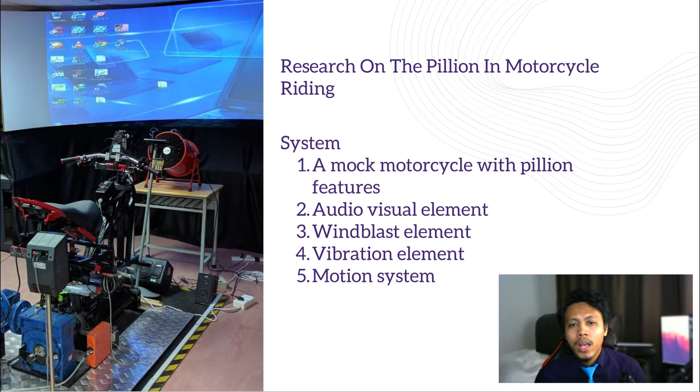riding a motorcycle. The vibration system for the simulator uses a device called ButtKicker Gamer 2. This device simulates the bumps on the road when using the simulator. Lastly is the motion system. The motion system uses a DC servo motor at the roll axis to simulate the roll of the motorcycle.

Since all of the simulator's equipment is plug and play, the screen hinders the ability for the simulator to be moved anywhere since it is permanently fixed to the facility. There are also some third parties that are interested in renting the simulator at an external venue. With the simulator being affixed to the facility, the laboratory has to turn down the offer. This causes a lot of missed opportunity for the facility.

Therefore, this project aims to solve this problem by designing a new screen that is portable for the use case of this motorcycle simulator. Research on the previous designs for the portable curved projector screen was done in order to find any design that would help in developing the design for this project. Through searches on Google Patents using a combination of keywords such as curved projector screen, curved portable projector screen, and portable projector screen, there are currently limited designs that will fit the use case of this project.

However, there are 2 patents that are notable. The first patent is from Starkweather, where it is an invention of a curved projection display that uses 2 or more rear projections for creating an immersive environment. The rear projection will project onto a translucent display with the distortion being corrected optically while being projected onto the screen. Meanwhile, the other patent is a patent on a portable projection screen which focuses on the portability of the

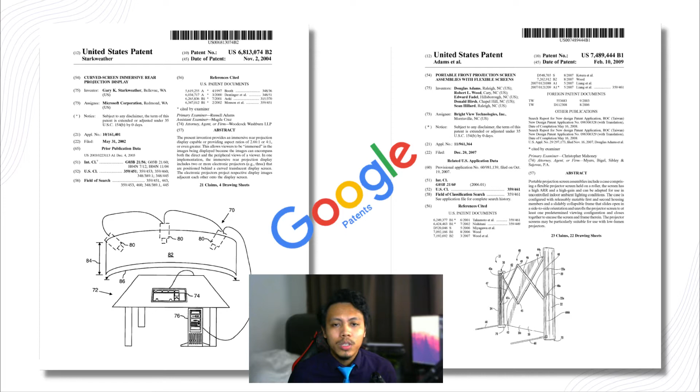projection screen. The projection screen is flat rather than curved. The patent uses a flexible projection screen held by a roller in which the screen is encased in a housing that can slide to collapse the projection screen. What this project needs is a curved portable projection screen. But why use a curved projection screen?

The curved screen was introduced in the year 1937 at the International Exposition in Paris. The idea of using a curved screen for projecting media was not commonly used until it was used by Cinerama. Cinerama inventor Fred Waller conducted research on the curved screen and concluded that the curved projection screen increases the immersiveness of the viewer by including the image in the viewer's peripheral vision.

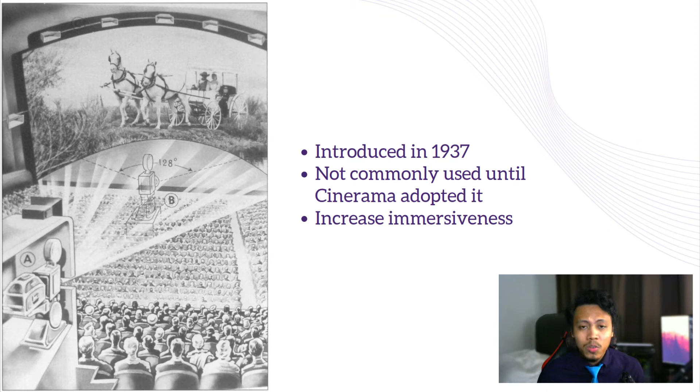This makes the viewer feel like they are right at the center of the image rather than viewing the image on a screen. But there are now widely available consumer products that are used to simulate virtual realities. The most common approaches in displaying images in simulations are through either head-mounted displays, monitors, or large projection screens.

The most immersive experience was found to be using the head-mounted displays and large projection screen. However, there is no significant difference in immersiveness when comparing the 2 methods, as both of them show the same level of immersiveness. The cost of a head-mounted display is significantly higher than a large projection display.

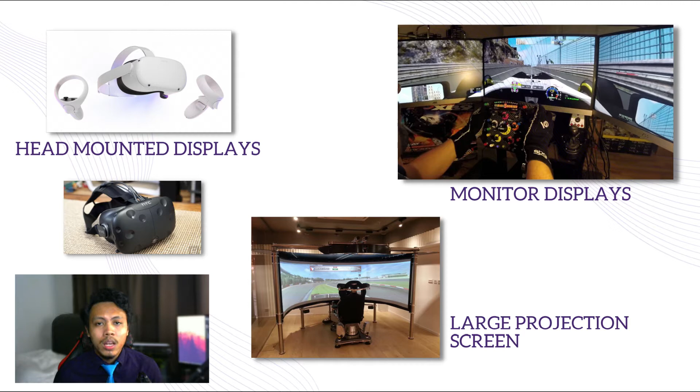Most head-mounted displays are wired, which would hinder any movement from the observer. Therefore, a large projection display shows more promise while being way cheaper than using a head-mounted display. Moreover, since the use case for this project is simulating riding a motorcycle, the use of a helmet is required. This would mean that there is no way to wear the VR goggles.

The development of the portable curved projection screen should take into consideration the human ergonomics while riding the motorcycle to ensure it closely simulates the riding experience of the motorcycle. The screen would consider the vision of the rider while wearing the helmet.

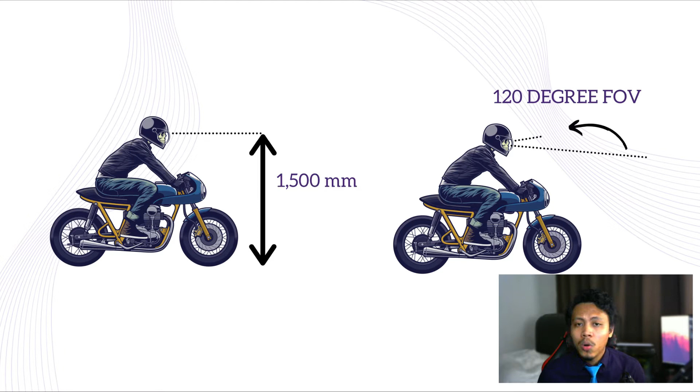The minimum peripheral vision allowed for a helmet is 120 degrees, and the riding height of the rider should be taken into consideration. The average ride height of motorcycle riders in Malaysia is 1.43 meters at eye level from the ground. Coupled with the additional height from the simulation system of Postura Motergo, the middle point of the screen should be around 1.5 meters in height.

Based on what has been said, there are currently limited designs of a portable curved projection screen. The existing designs are either curved or portable. There is no design that incorporates the two together. Therefore, to fulfill the need of the Metal Labs Postura Motergo indoor motorcycle simulator, a new design that considers both criteria is needed.

Therefore, the objectives of this project are to determine the design parameters of the portable curved projection screen, to design the portable curved projection screen based on the determined parameters, and to analyze and validate the design using computer-aided design and computer-aided engineering.

The scope of this project is to design a portable curved projection screen for the Postura Motergo motorcycle simulator. The project should be limited to the design of the screen for the motorcycle simulator. Therefore, the design of the screen should take into consideration any relevant specification of the simulator itself.

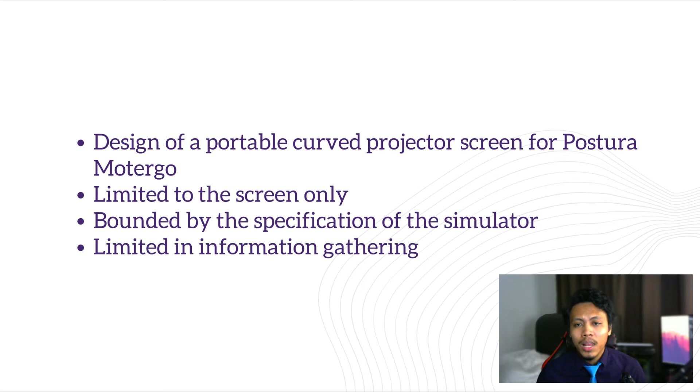On top of that, with the ongoing movement control order due to the COVID-19 pandemic, the project is limited to online pictures of the simulator, online discussion with the members of the Metal Lab, and the journal for the motorcycle simulator as a source of information for this project.

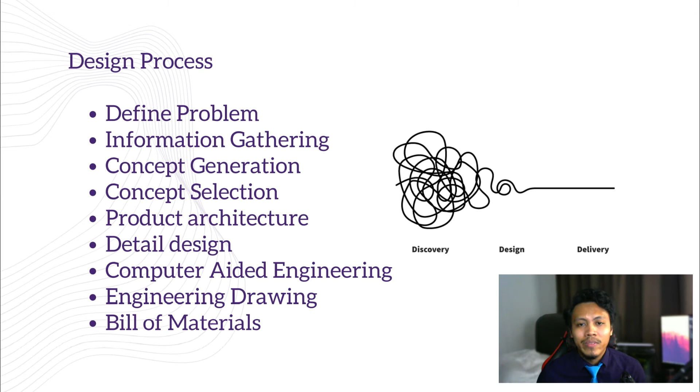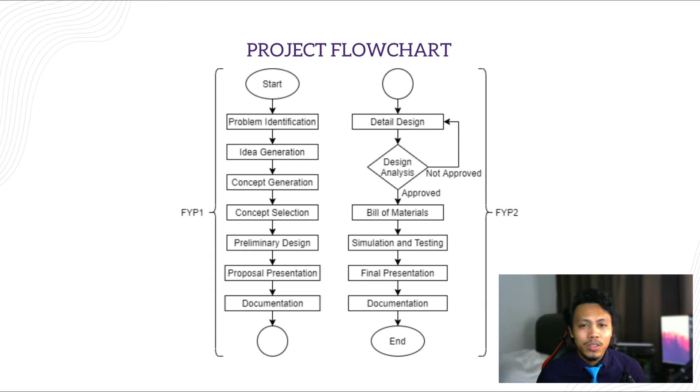FYP1 will cover the problem identification, information gathering, concept generation, concept selection, and preliminary design on top of this proposal presentation and documentation. As for FYP2, the project will continue with the design process with the product architecture, detailed design, computer-aided engineering, engineering drawing, and bill of materials.

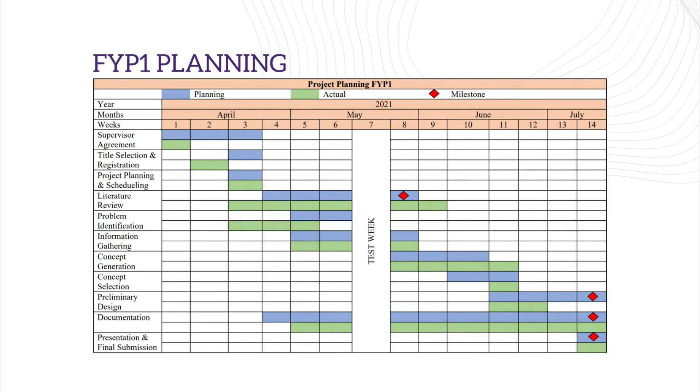And this is the Gantt chart for FYP1, which has been completed during this semester. The Gantt chart shows my progress in this project along the semester from week 1 until week 14. Most of the problem identification was made through speaking with the Metal personnel, who voiced their opinions on the existing projection screen. The information was gathered and used as the design goal for this project.

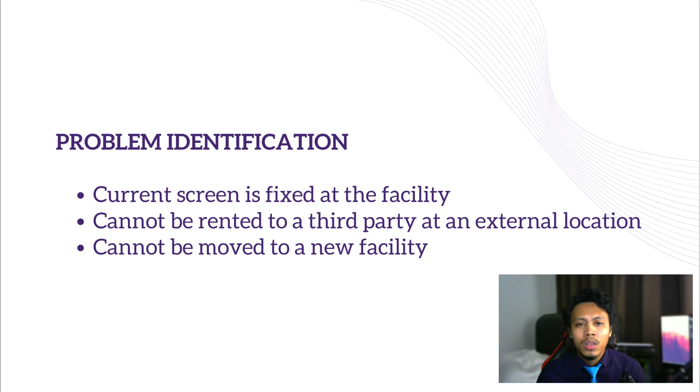The main problem with the current design of the projection screen is that it is permanently fixed to the Metal laboratory, which causes more problems, such as it cannot be rented to a third party at another location for profit. The Metal laboratory cannot be moved to a new facility, and the screen was made from plywood and metal, which was a cost-saving measure in the early development of the simulator.

The product on the market was taken as a benchmark when designing the projection screen. This product was taken from an online marketplace called EC21. The product will act as a design benchmark for this project. Using the gathered information, a product design specification was developed. The PDS helps to address the needs of the Metal laboratory with the design of the project.

The PDS for this project is that the product is to be used as a projector screen. The screen must maintain a recognizable screen ratio. The height from the eye level of the rider to the middle of the screen is 1.5 meters.

The screen is curved at a radius of 1.5 meters. The screen has a 120-degree field of view. The product can be disassembled and reassembled. The disassembled parts must not exceed 2 meters in height and length.

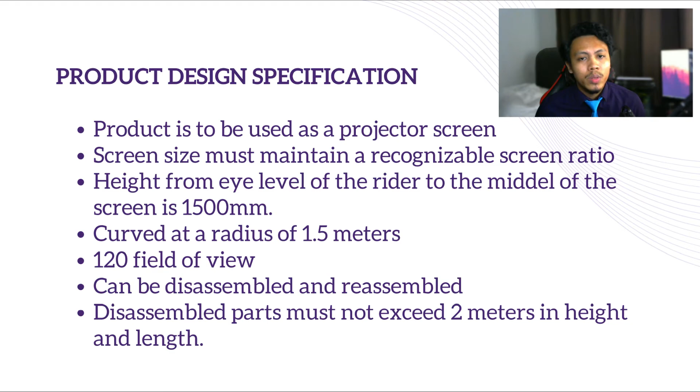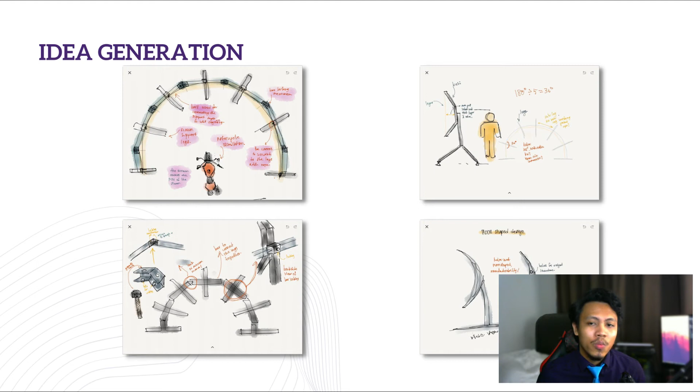The idea for this project was sketched in order to document the ideas for it to be considered in the concept generation. Some of the sketches were used in the concept generation while some were scrapped as the product design specification evolved.

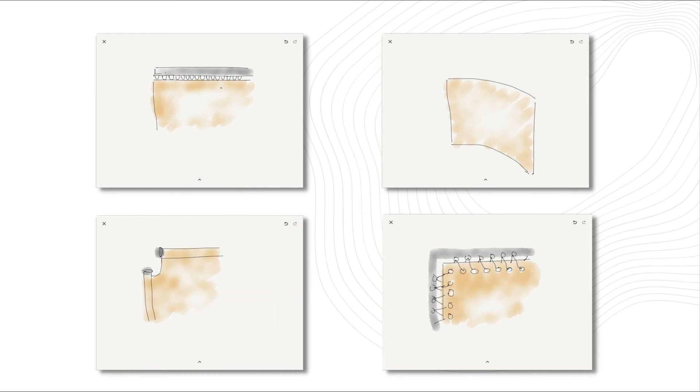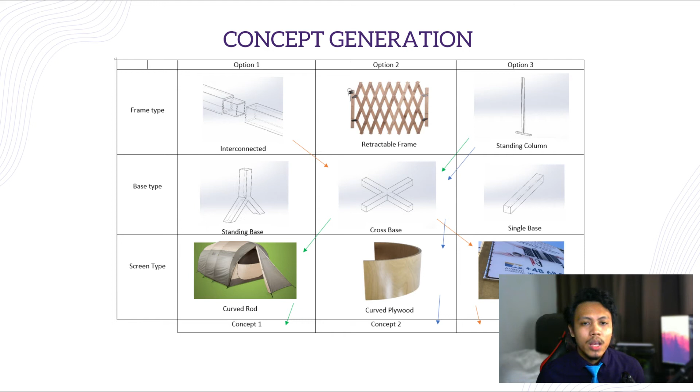The method used for concept generation is by using morphological charts. 3 concepts were generated using the morphological chart. The chart shows the components selected when developing the concepts. Some of the concepts were inspired by real-world items.

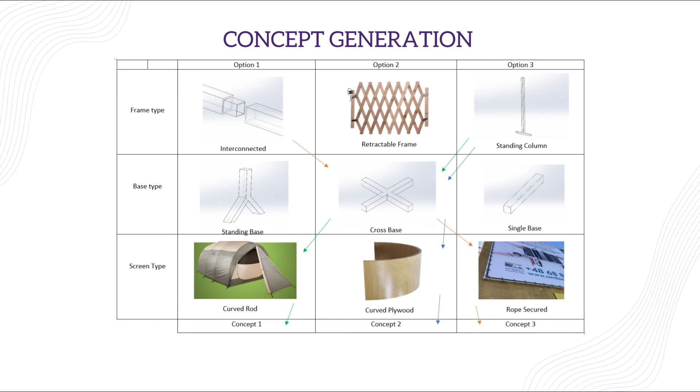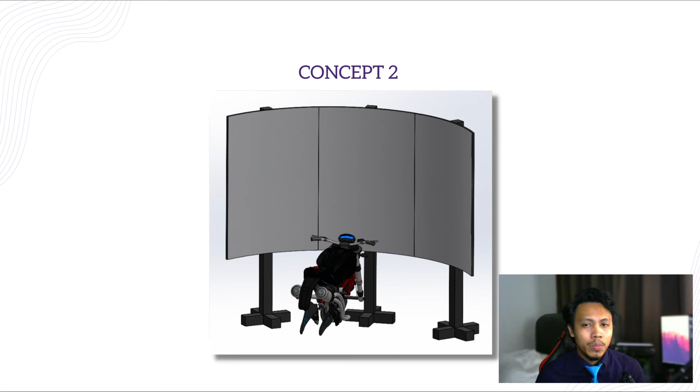The standing column was combined with a cross base and curved rod for the screen type, while for concept 2, the standing column is combined with a cross base and a curved plywood. Lastly, for the third concept, we have an interconnected design combined with a cross base and rope secured canvas design.

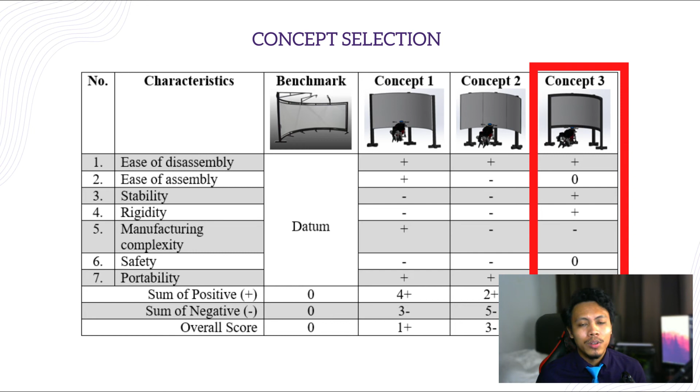Now that there are 3 concepts for the project, only one design concept would be selected to be used in this project. The selection of the concept was done through using a Pugh chart. The Pugh chart was used to compare the concept with the benchmark design to find the design that is not only better than the benchmark design, but better than the other concepts.

The concepts were compared to the benchmark on the different characteristics. The benchmark acts as the datum point for the evaluation of the other 3 design concepts. The overall score determines the best concept design for the project. Based on the Pugh chart, the best score for the design of this project is the concept with a score of 3+.

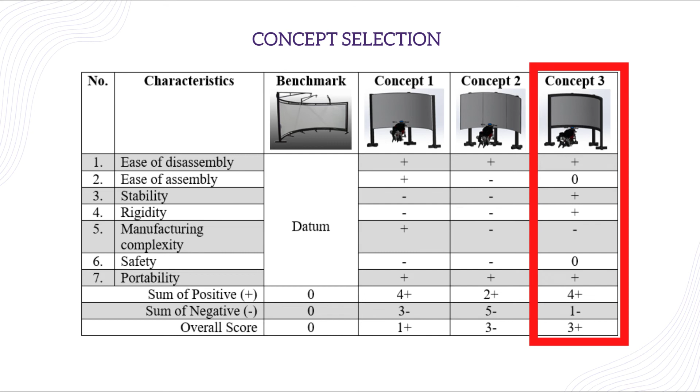The design concept selected is concept 3, which scored a 3+ with positive in ease of disassembly, stability, rigidity, and portability. On the other hand, the design scored a 1- in the characteristic of manufacturing complexity when compared to the benchmark design. It also scores a neutral in the ease of assembly and safety,

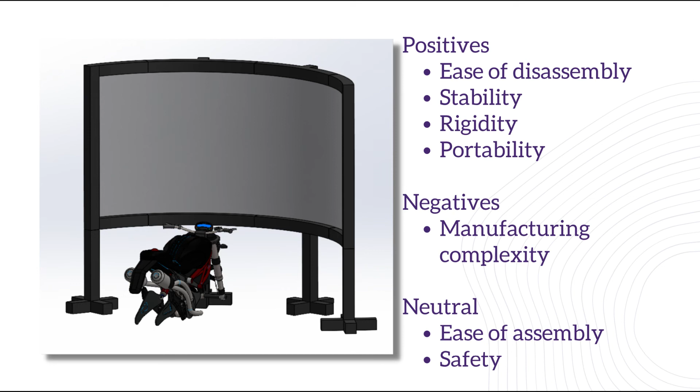which means that the design is the same as the benchmark, and the design was selected because of the strength it has when compared to the other 2 concept designs, as well as compared with the benchmark design. The selected design has similar features to the benchmark design, but with the innovation of adding portability to the design by dissecting the structure into sections that can be disassembled.

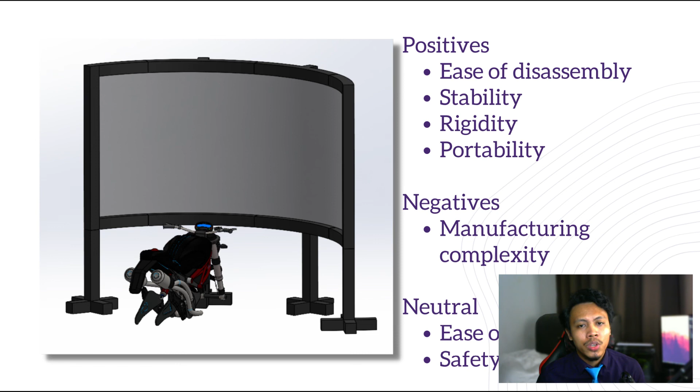The foot base of the design was also changed from the benchmark to accommodate the different sections that can stand alone when disassembled. The base was redesigned to give a large surface area to increase stability. The structure, when fully assembled, will be secured by the same rope that is used to secure the canvas screen to the structure of the portable curved projection screen.

As proof of concept, here is the design of the projector screen in SolidWorks, which shows the ability of the screen to be disassembled and reassembled for portability. The preliminary design will be used in FYP2 for the continuation of the project, where the design will move on to the next stage in the design process.

The detailed design analysis and bill of materials for the design will be made in FYP2. The design will be tested in simulation and the results of the testing will be analyzed. The cost analysis for the design will also be taken into consideration in FYP2.